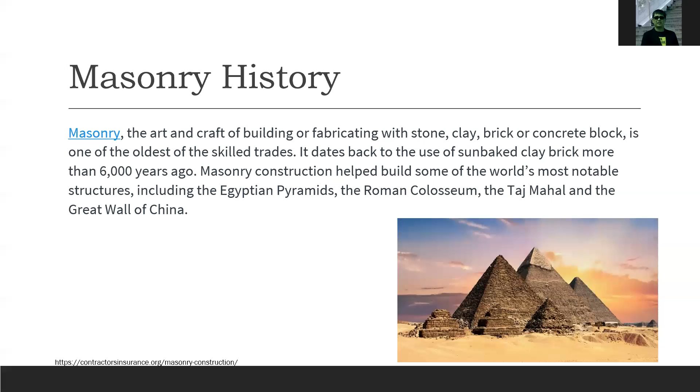So they were piling stones so that they could live under the stones. So those are masonry. It's a crude form of masonry, but the use of stone as a structure or shelter was being done during that time. But during the Egyptian period, there were structures that were built using limestone and granite.

So in the early days of masonry construction, the art of masonry began spontaneously in the creation of walls from stone or pieces of caked mud. The first mortar was just mud smeared in between pieces of stone to add stability. Over time, brick and later limestone were introduced in masonry construction. So the first type of masonry construction was mud and stone. They used the mud as the mortar.

So the stone should be able to attain a stable stone and mud connection. During those times, there was no mortar yet. So they used the mud, or putik, as a binding material. And during the early time, before 6,000 years ago, before the time of the Egyptians, they used the mud and the stone as temporary shelters or structures.

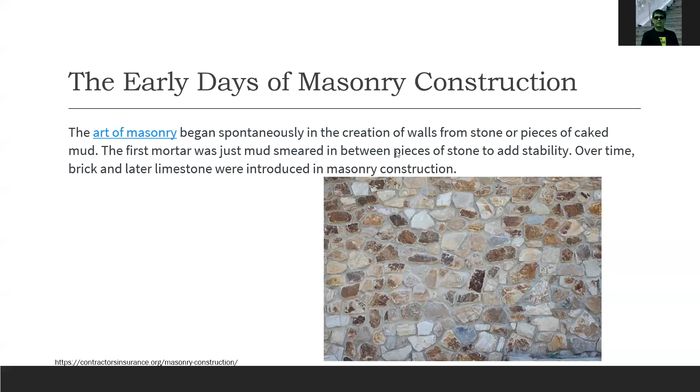During the Egyptian period, as long ago as 2,600 BC, the Egyptians were using basic masonry to build one of the most impressive structures ever created. They created the pyramids by stacking large pieces of limestone. Granite was used to construct the roofs and walls of the burial chambers. Gypsum and rubble were used to fill in the gaps to stabilize the structure despite having almost no binding properties. Egyptian workmen likely used copper chisels, drills, and saws to cut the limestone.

So there was a boom in building structures during the Egyptian period. They used limestone or granite. They quarried it from a mountain, cut it to specific sizes, then put the pieces on top of each other, and they used gypsum and rubble as binders. But sometimes they used a dry type of construction, without any adhesives or mortar. And sometimes they used mud as part of the binding mortar.

As you can see in the Temple of Isis and the Philae Temple, those are structures using cut limestone as the material for the building. The Egyptian masons cut the limestone and then put it on top of each other. There are several theories regarding how they built it. There was no exact engineering or exact science during that time to help them build those structures, but they certainly did a good job.

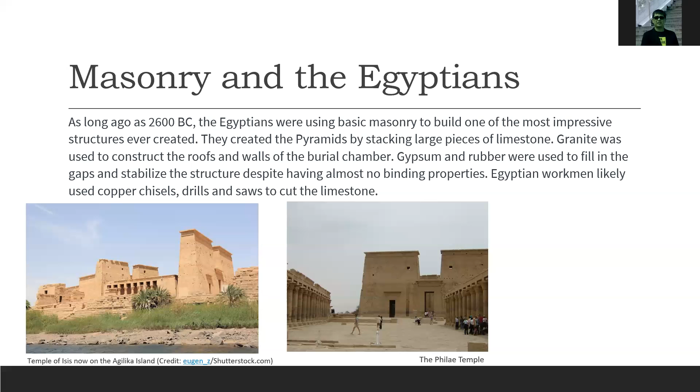In this period, it would be difficult for us to build those structures without machines. We need machines to build those structures, but during that time there were no machines to help them.

In the Middle Ages, or medieval times, stone was frequently used to build castles, bridges, cathedrals, and other structures that were designed to stand the test of time. Stone gave masons an opportunity to build much higher and support much heavier structures. Castles were sometimes built with a combination of masonry stone and limestone plaster, which provided a bright white and yellow color.

So as you can see, during the Middle Ages there were limited technologies available, but there were skilled craftsmen trained to do this type of masonry work. Unlike the Egyptians, for whom we have no specific data on how they did it, during the Middle Ages there are writings and books we can search on how they built those castles.

The cathedrals are still standing. We can still see those cathedrals and castles, but some of them have deteriorated because of exposure to weather, while some are now being restored, like in our country, the Philippines, where we restore old churches that were built during the Spanish period.

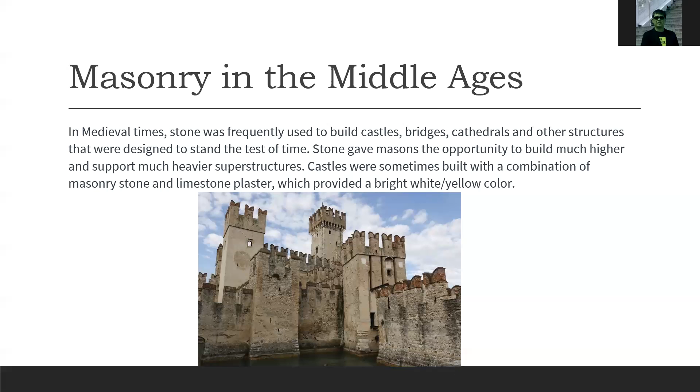So if you see the church in Iloilo, they used eggshells and egg white as binding material combined with limestone to make plastering, to plaster the churches.

So masonry during the Industrial Revolution: in America and Europe, machines were developed that made masonry much easier. These technological advances made it simple to quarry, transport material, and mold bricks. For the first time, sophisticated mathematics were used to create more elaborate structures. Buildings of this era were noted for having greater strength and durability.

So as you can see, during that time, we now have the machines that can help the craftsmen or the masons to build the buildings. And schools are open to teach people to design structures, to use the proper material. But there is also limitation during the Industrial Revolution, because of the availability of material and technology, compared to our era.

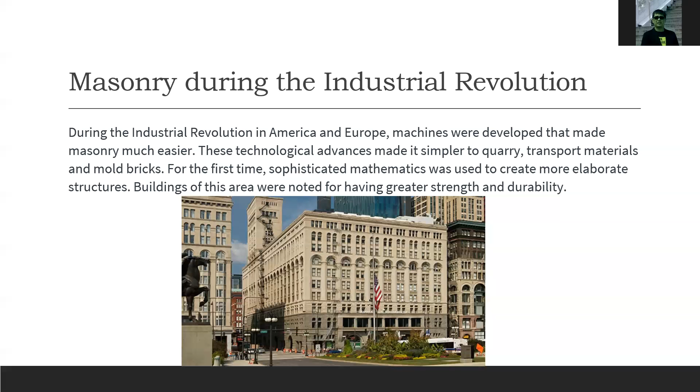But there also came a time that skyscrapers were built, and the art of masonry somewhat lost its luster in the late 19th century, after metal frames replaced stone-bearing walls in very tall buildings in major cities. However, the development of the concrete block used in such structures can be traced back to brick construction. Concrete block is frequently used today in construction because it's much cheaper than cut stone and requires less labor than laying brick.

So it is a building using metal as frame, combined with concrete hollow blocks. So the use of solid or quarried stone was replaced by the use of metal frames. Instead of using quarried stone, putting one atop each other, they now use the metal frame. So it created a higher building. So this was the birth of the skyscraper.

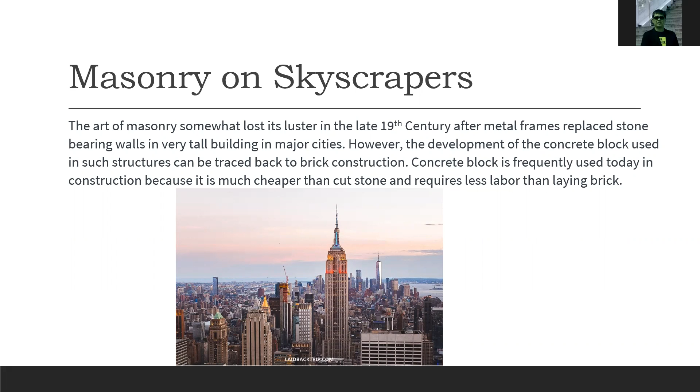So masonry structures are built from individual units laid and bound together by mortar. The term masonry can also refer to the units themselves. The common materials of masonry construction are brick, stone, marble, granite, limestone, cast stone, hollow concrete block, reinforced brick masonry, glass blocks, stucco, tiles, and others.

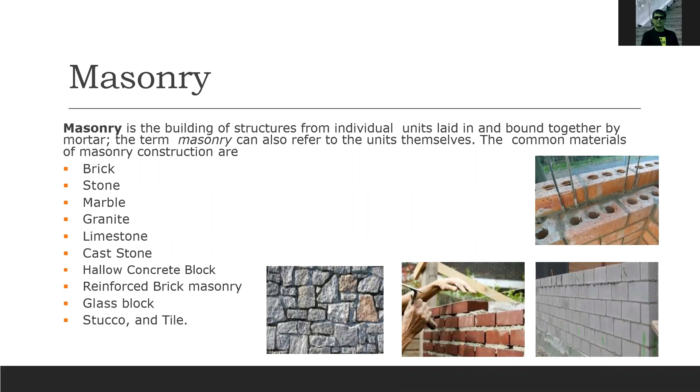So as you can see in the illustrations, you can see the use of stone, the use of bricks, and the use of hollow blocks. So these are the different materials that you can use in masonry construction. Masonry is commonly used for walls of buildings, retaining walls, and monuments.

Bricks and concrete blocks are the most common types of masonry in use in industrial nations and may be either weight-bearing or a veneer. Concrete blocks, especially those with hollow cores, offer various possibilities of masonry construction. They generally provide great compressive strength and are best suited to structures with light transverse loading when the cores remain unfilled. Filling some or all of the cores with concrete or concrete with steel reinforcements, typically rebars, offers much greater tensile and lateral strength to the structure.

So there is also an evolution in the use of masonry in construction, from using crude stone to the recent concrete hollow blocks. But now we have prefabricated concrete, available in different sizes and shapes, and some are being installed using the masonry principle.

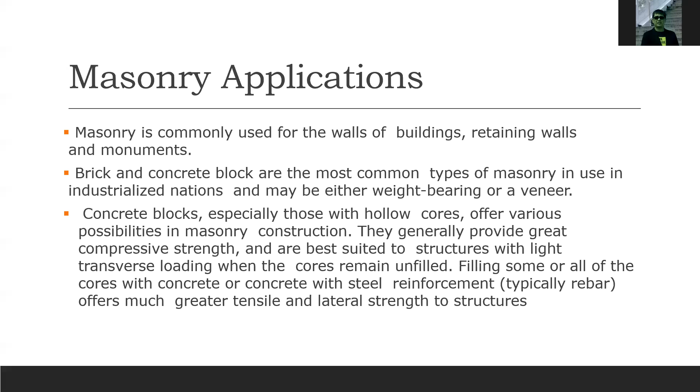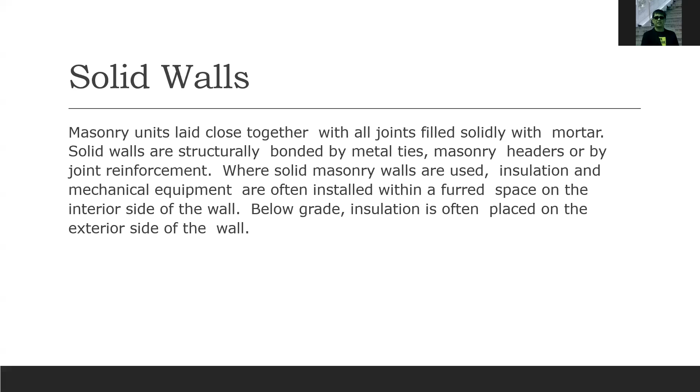In the veneered wall, this type of masonry is used as a facing material; in this case the masonry does not act structurally. It serves to perform as a weather barrier and as a finish material. Insulation and mechanical equipment is normally located between the studs.

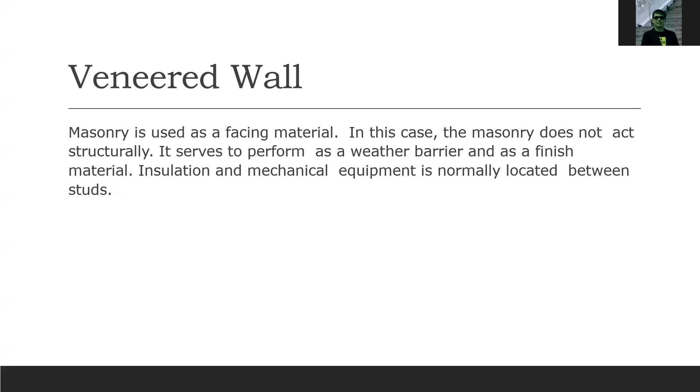So the veneer is what we now call the tiles, right? So it is a surface or the facing material, interior or exterior, of the masonry. Okay, so that is the masonry veneered wall. This veneered wall acts as an exterior finish and at the same time protects the solid walls. But it doesn't have the structural characteristic to stand on its own. It needs a wall to be attached on.

Cavity walls are composed of two wythes of either solid or hollow masonry, separated by a continuous airspace and bonded together with metal ties or joint reinforcement. The cavity offers important advantages in areas of severe exposure. The continuous air space provides insulation value and a place where additional insulation may be installed. The continuous airspace acts as a barrier to moisture penetration.

In cavity walls, insulation and mechanical equipment are often installed within the cavity or within the furred space on the interior of the wall. So this cavity wall is two solid walls with a space in between them. The space in between the two solid walls is the cavity where you put the electrical, plumbing, and mechanical works, and it also acts as insulation where you can put moisture protection, heat protection, and other utilities. You can use that cavity.

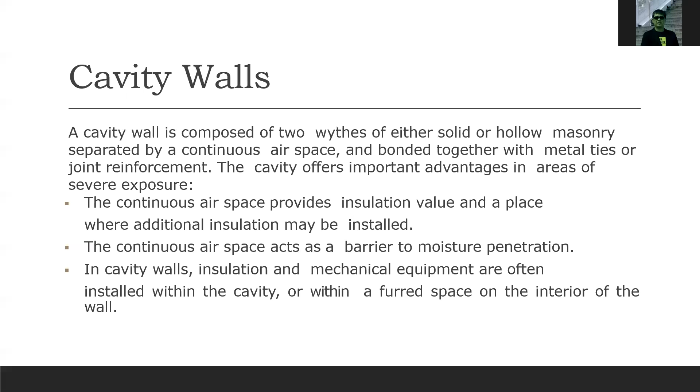Mortar acts as a cementing material that binds individual masonry units together to act as a homogeneous mass. Common mortars used in brick masonry are cement mortar, lime mortar, cement lime mortar, lime surkhi mortar, and mud mortar. So these are the different types of mortar that you can use in binding stones or masonry.

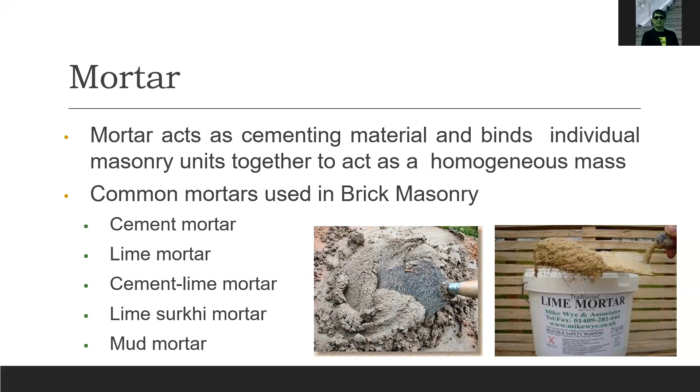Brick masonry is made of clay or shale, formed, dried and fired in a manufacturing process. These variations are addressed by a durable ceramic product. When bricks are laid in mortar in a proper systematic manner, they form a homogeneous mass which can withstand forces without disintegration. This mass of structure made by the use of bricks is called brick masonry or simply brickwork.

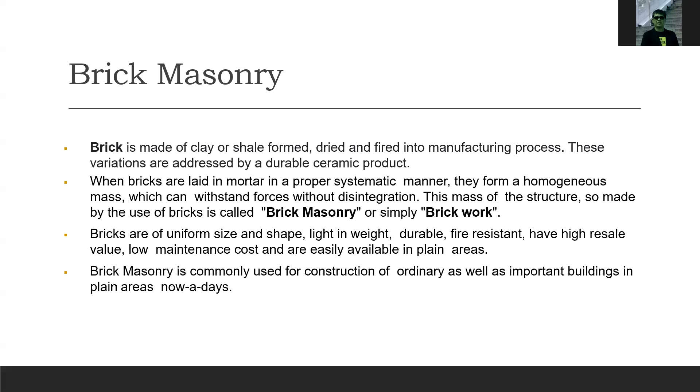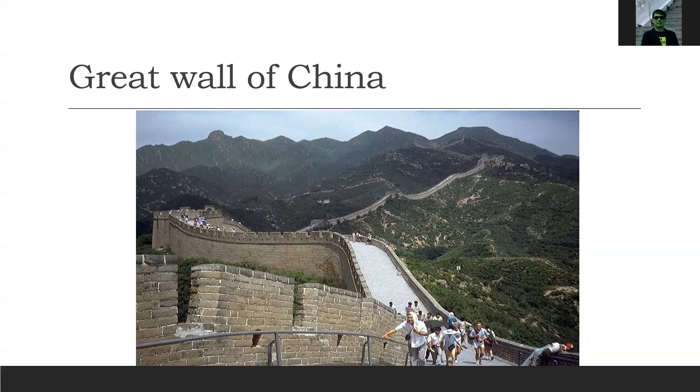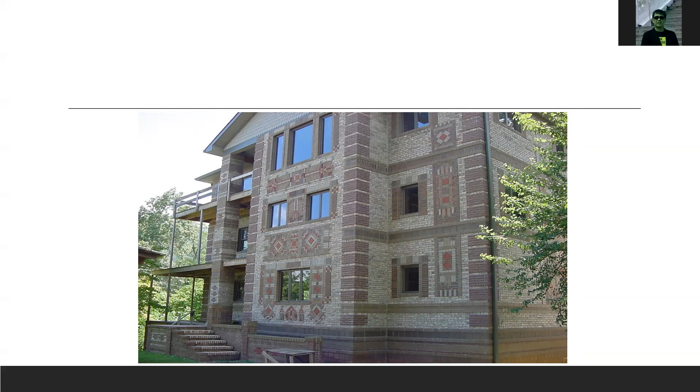Okay, so the brick positions. We will now go into the different positions of the bricks. If you lay the brick on its flat side, this is called the stretcher. If you lay the end of the brick flat, that's called the header. If it's standing up and showing the shorter side, it's the soldier. If it shows the bigger flat area, it's the shiner. Then if it shows the edge turned on the other side, it's the rowlock. And if the shiner is in the vertical standing position, it's a sailor.

So as you can see, the sailor and the soldier are vertical, right? The stretcher and the shiner are horizontal. And the header is horizontal, but it shows the ends of the brick. So these are the different positions. It's important because you will see all of these positions in the different samples of how they lay down the bricks.

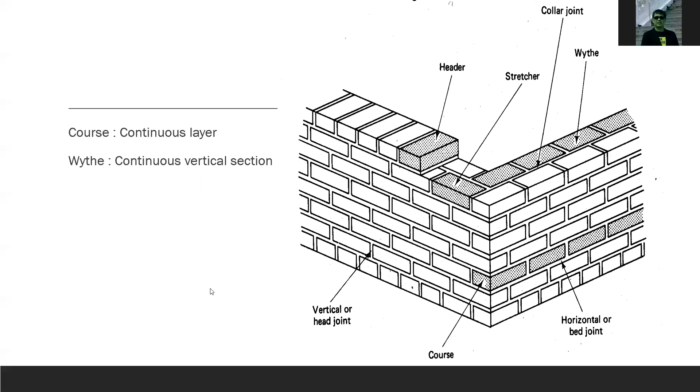Now, the different terminologies that are being used for this brick laying can be seen also on different brick layouts later. So as you can see, this is the head joint, the vertical connection of the mortar; that's called the head joint. The horizontal connection of the mortar, that is the bed joint. And the layers of bricks are called the courses. So each layer of the brick is called a course, or horizontal layer of brick.

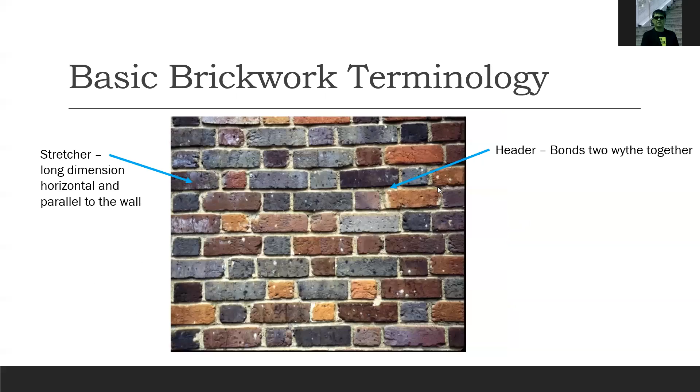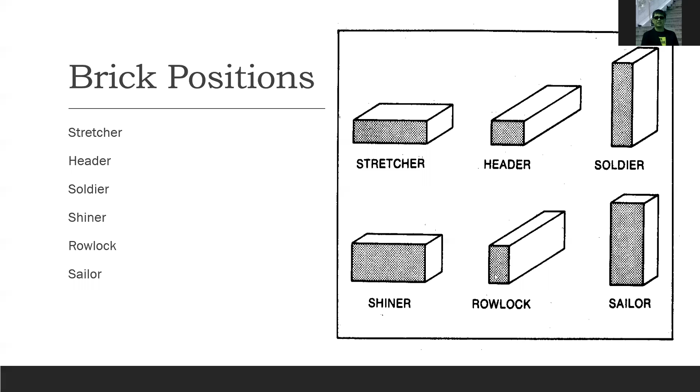Okay, so this is also what you call the stretcher, that is the face of the brick. And the header, that is the bonds two wythe together. The header, this is the wythe. And this is the header, as you can see. So the rowlock, that is laid on the face and the end visible. This is the rowlock. It's also here. Okay, that is the rowlock. This is the header. So these are all different terminologies in positioning of the bricks.

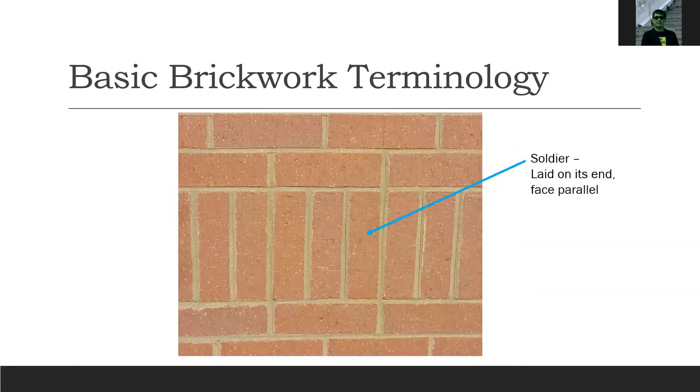Okay, bond is the arrangement of bricks or stones in each course, so as to ensure the greatest possible interlocking and to avoid the continuity of vertical joints in two successive courses, both on the face and in the body of a wall. So this is to avoid the vertical joints. Because the bricks usually don't have reinforcement, they avoid the vertical joints being connected above each other, because that will weaken the wall.

So a bond is provided to achieve the following objectives. The primary objective of providing a bond is to break the continuity of the vertical joints in successive courses, both in the length and thickness of the masonry structure. This is to avoid the vertical connections meeting each other, so the structure will act as a bonded mass and its load will be transmitted uniformly to its foundation.

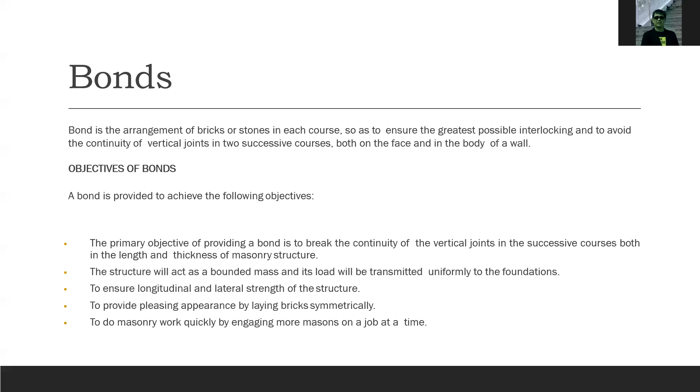To ensure longitudinal and lateral strength of the structure. It is also used to provide pleasing appearance by laying bricks symmetrically, and to do masonry work quickly by engaging more masons on a job at a time. So this will make it faster if you do it by designs or by patterns. They can repeat the patterns on other sides and it will certainly meet, because of the regularity of the joints, or the design of the joints. So this is the brick bonds.

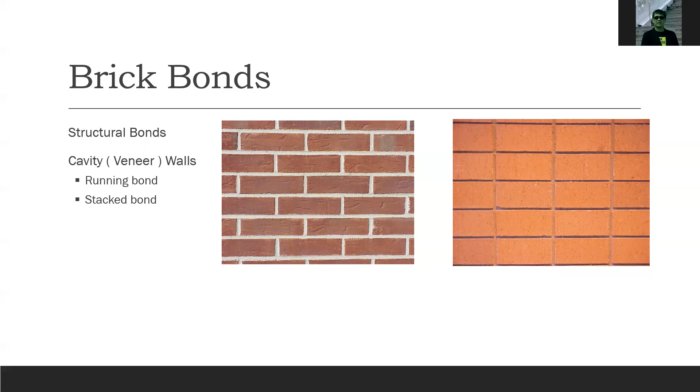On the left side, this is a cavity veneer wall. So this is the running bond and the stack bond. This is a way to install veneer, the veneer or the facing of a thin brick, surface facing. So this is what you call the cavity wall, running bond, and the stack bond. The one on the right side is the stack bond, and the one on the left side is the running bond.

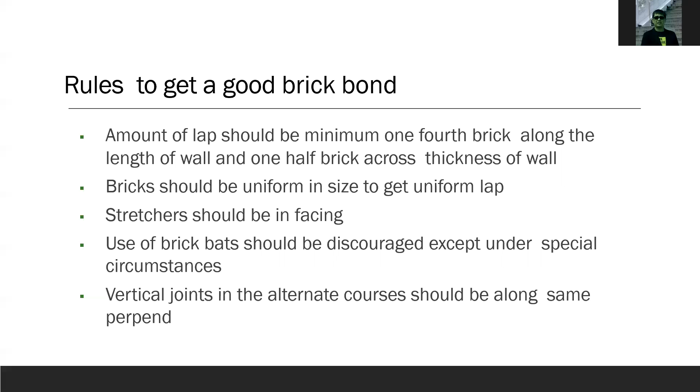So rules to get a good brick bond. Amount of lap should be minimum 1/4 brick along the length of the wall and 1/2 brick across the thickness of the wall. Bricks should be uniform in size to get a uniform lap, and stretchers should be in facing. Use of brick bats should be discouraged except under special circumstances, and vertical joints in the alternate courses should be along the same perpend.

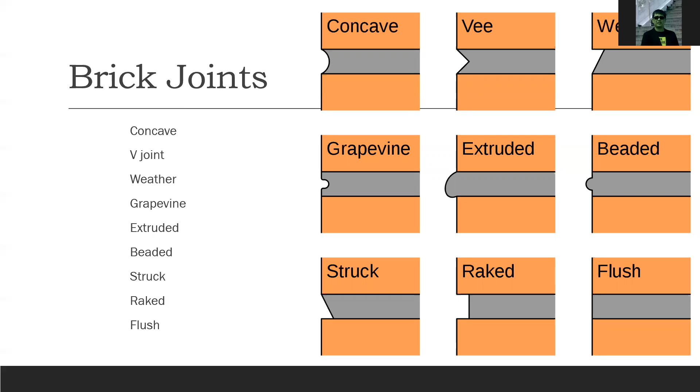So these are the different brick joints. You can see the concave, the V joint, the weather, the grapevine, extruded, beaded, struck, raked, and flush. So these are the connections, or the mortar finishes, in between two bricks. So as you can see, this is the concave joint.

It is the most common joint that is used, as it is also known as the best joint for preventing water penetration. Tooling works the mortar tight into the joints, which produces better weather resistance. So there is a specific tool that you need to use to create a concave joint.

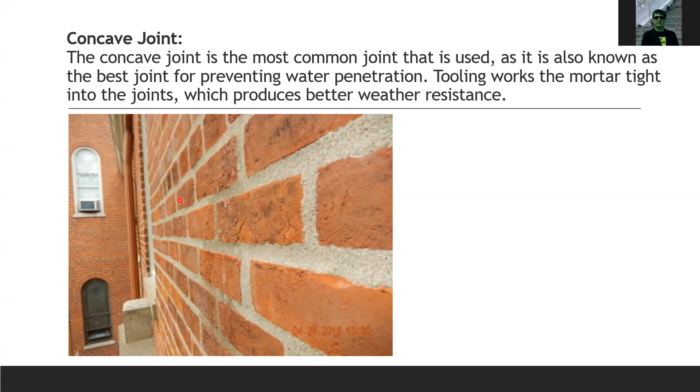If it is not tooled correctly, water can accumulate in the joint. Similar to the concave joint, tooling works the mortar tight and can help prevent water penetration if done correctly. So you need a specific type of tool to create those joints.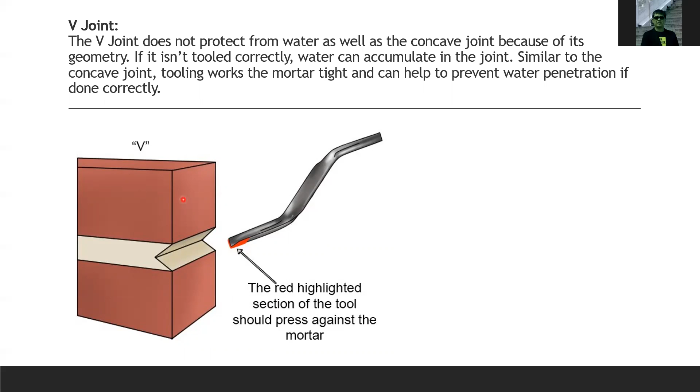The V joint. This is the rake joint. The rake joint is another joint not recommended for exterior use because of its ledge. It may allow water, snow, ice to sit on top of the brick due to the fact that the mortar sits back from the face of the brick. There is less cover face between the face of the mortar and the joint and top of the brick unit where the cores exist. Saturated mortar joints can allow water to enter the cores and penetrate through the wall.

So in this section, in this brick, as you can see, the brick is like this one, and then there is what you call another mortar, and there is another brick, and the mortar is here. This is the mortar. Okay, so there may be another brick on this side. There may be another brick on this side, and there is mortar also on this side.

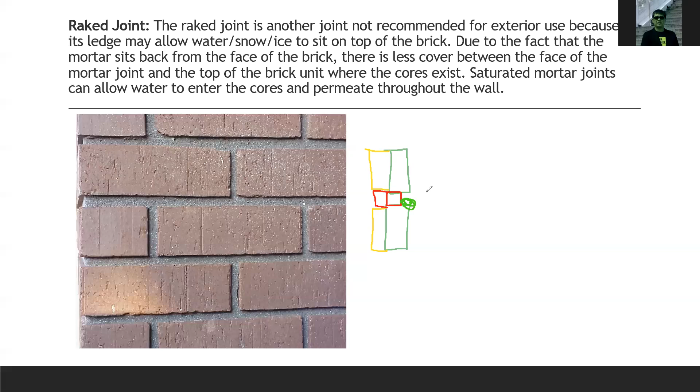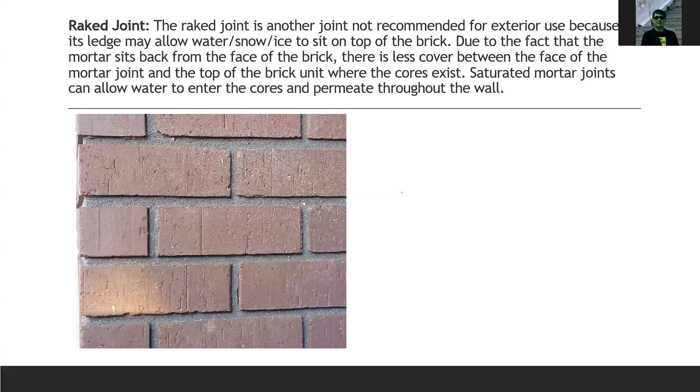Okay, but the problem is with this type of brick layout, water can accumulate on this side. Water can accumulate, and there will be penetration of water or seepage. So this type of rake joint is not recommended for exterior brickworks. Okay. Okay, so this is a sample of a brick using concave design.

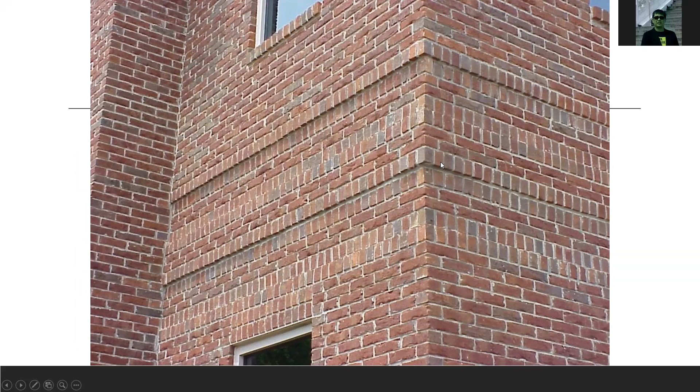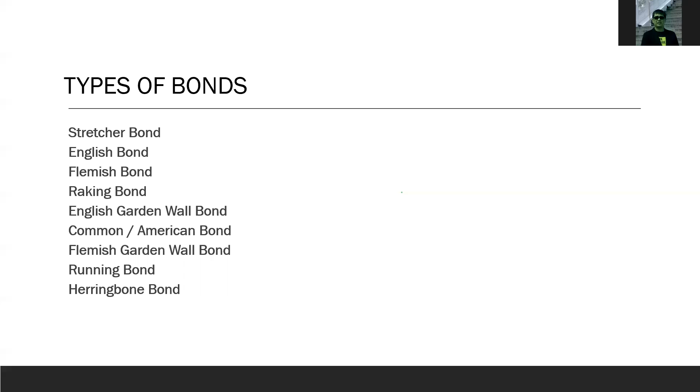So types of bonds: we have the stretcher bond, the English bond, the Flemish bond, the raking bond, English garden wall bond, common American bond, Flemish garden wall bond, running bond, and the herringbone bond. So this is the stretcher bond, as you can see. This is the easiest bond to lay and minimizes the amount of cutting required. Originally used for single brick walls, now called the half brick walls. It became the obvious choice for cavity walls and less cutting was required. So this is more economical and more practical to use because there is less waste of bricks.

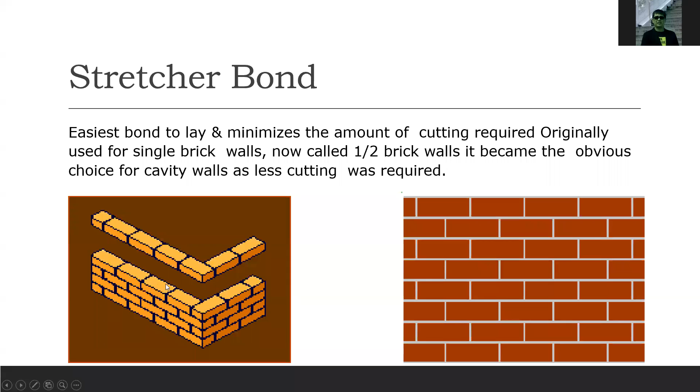So the position of the brick is alternate. The connection of the brick is alternate, as you can see. But the sizes of the bricks are all the same. So this is the English bond. The difference is the perpendicular and the parallel. As you can see, this is the parallel and this is the perpendicular. So it's an alternate: parallel, perpendicular, parallel, perpendicular. This is called the English bond. Okay. So as you can see in the exterior, this is the parallel and this is the perpendicular, so this is the English bond.

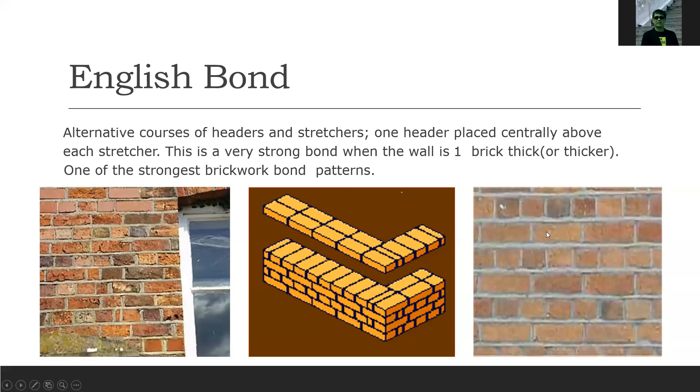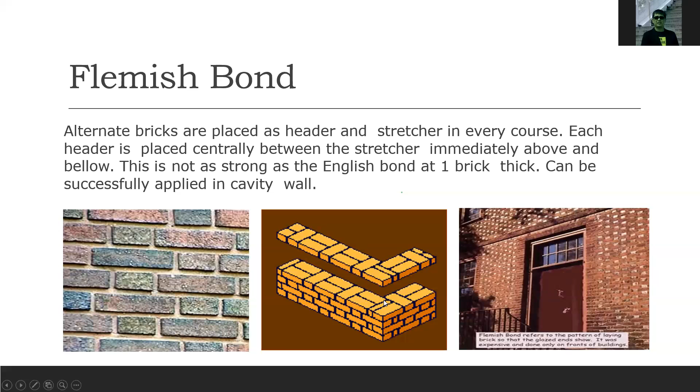So there is also what you call the Flemish bond. Alternate bricks are placed as header and stretcher in every course. Each header is placed centrally between the stretchers immediately above and below. It is not as strong as the English bond at one brick thick and can be successfully applied in the cavity wall. As you can see, there is also an alternate, but there is one, and then there is two: perpendicular, parallel, perpendicular. So this is called the Flemish bond.

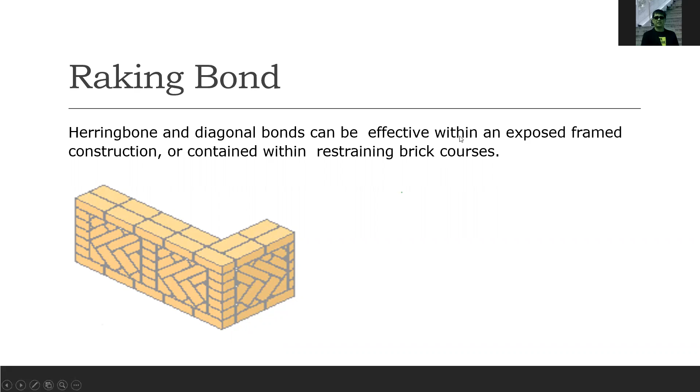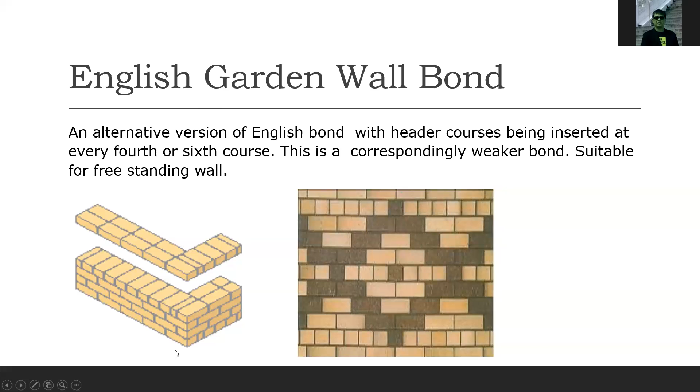So this is the English garden wall bond. A header course is inserted at every 4th or 6th course. So this is the design that you will see if you use an English garden wall bond. This is the way it will be laid out, and this is the design. The common American bond and the Flemish garden wall bond.

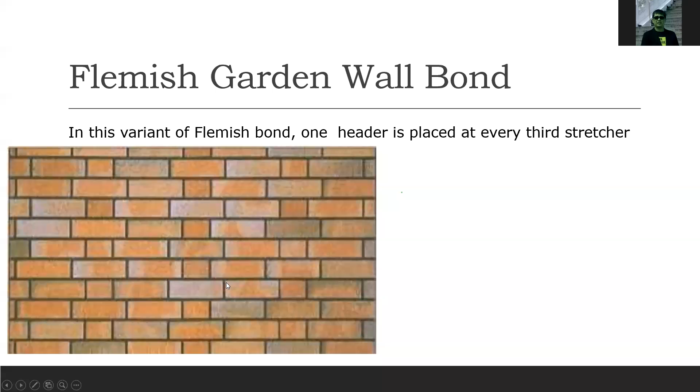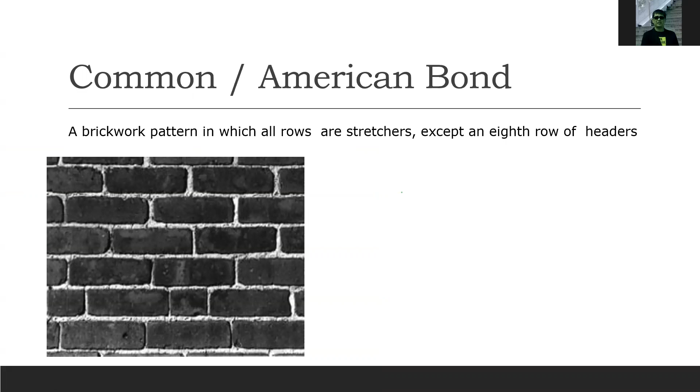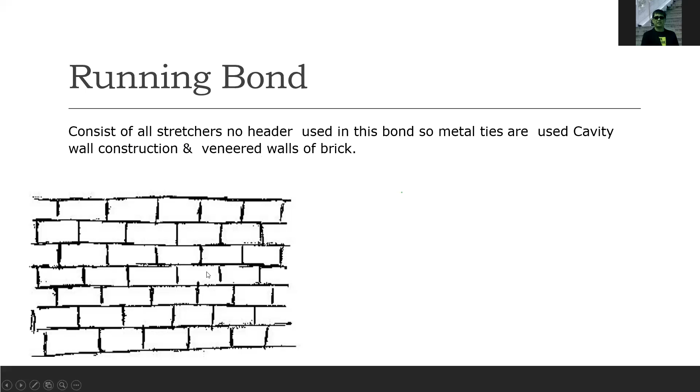And this is the running bond, similar to the common American bond, except the headers on the 8th row. So in the common American bond, every 8th row there is a change of direction of the brick. But the running bond consists of all stretchers, no header. Metal ties are used in cavity wall construction and veneer brick walls. This is what we usually see, the running bond. This is the herringbone bond. It's a purely decorative bond, used in floors, walls and panels.

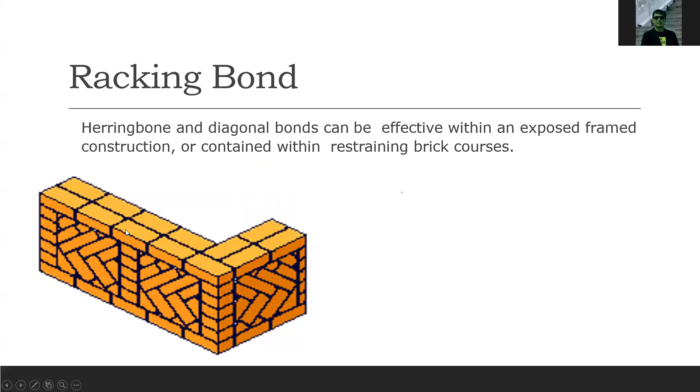The raking bond, herringbone and diagonal bonds can be effective within exposed frame construction and contained within restraining brick courses. Now we go to the stone masonry.

Rock that is removed from its natural site and generally cut or dressed and then finished for building purposes is called stone. The art of building the structure with stones as construction unit is called stone masonry. So if you quarry a stone and then cut it to a specific size, or not cut it to a specific size, it's called stone masonry.

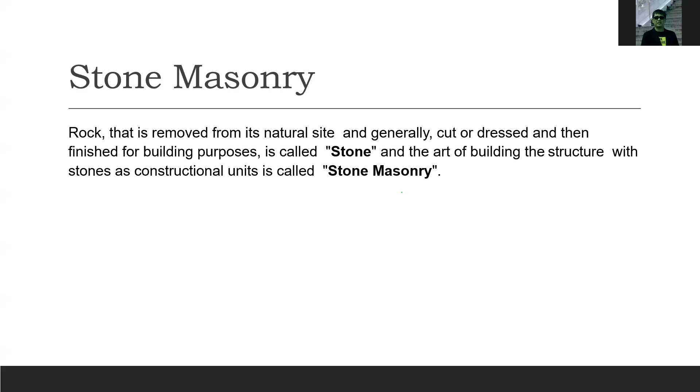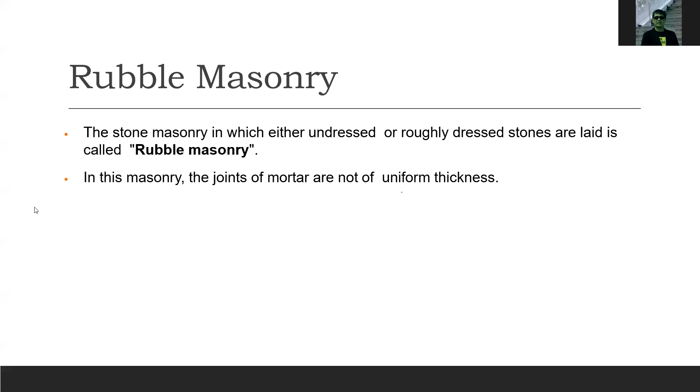We have different types of stone masonry: rubble masonry and ashlar masonry. Rubble masonry is the stone masonry in which either undressed or roughly dressed stones are laid, and the joints of mortar are not uniform in thickness. We have different types of rubble masonry: uncoursed rubble masonry, coursed rubble masonry, built to regular coursed masonry, polygonal rubble masonry, flint rubble masonry, and dry rubble masonry.

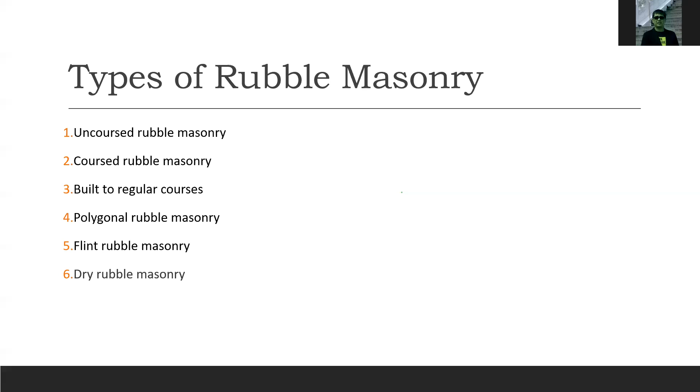Uncoursed random rubble masonry is the masonry in which all stones are laid without forming courses. This masonry is the cheapest and roughest type of masonry. The stones used are of different sizes and shapes. Larger stones are used at the corners and jambs to increase their strength.

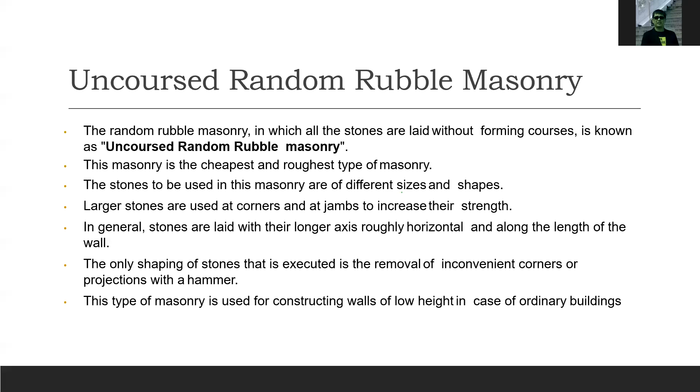In general, stones are laid with their longer axis roughly horizontal and along the length of the wall. The only shaping of the stone that is executed is the removal of inconvenient corners or projections with a hammer. If there are corners or irregular corners, they will be trimmed using a hammer. This type of masonry is used for constructing walls of low height in ordinary buildings.

The bonders are stones which reach beyond the middle of the wall from each face to overlap in the center. The throughs are stones which extend the full thickness of the wall. Throughs should not be used in external walls, as moisture may be conducted through them and cause dampness on the internal face.

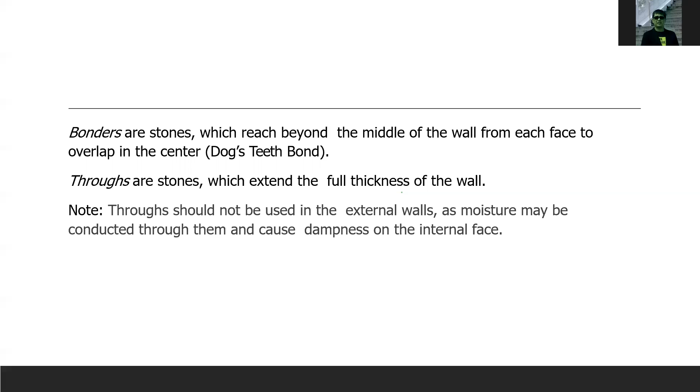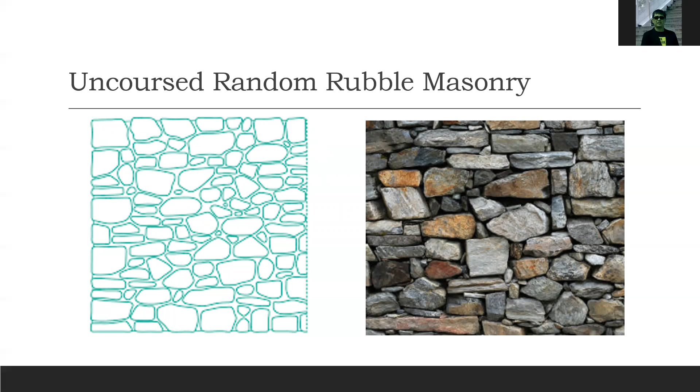This is a sample of uncoursed random rubble masonry. As you can see, the shapes or sizes of the stones are not even - they are not all the same. They have rough edges and are randomly arranged. That is why it's called random rubble masonry.

In coursed rubble masonry, the stones are laid in layers of equal height - so there is now a regularity. If smaller stones are encountered, two or three stones are stacked one above the other to obtain the height of the course in which it is placed. Such stones are placed in intermediate courses and avoided at corners, bedding, and other critical locations.

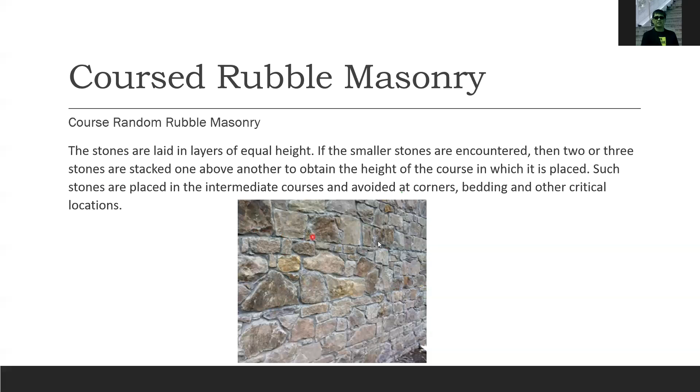You can see now the horizontal lines in this coursed rubble masonry - there is a recognizable horizontal line which they try to maintain and attain by combining smaller and bigger stones, creating a flat horizontal line for another layer to be installed. As you can see in this drawing, there is a horizontal line, and from this line to this line they put smaller, medium-sized, and small stones to create the specific height they want. So there is a horizontal layering of the rubbles.

Now we have the coursed square rubble masonry. In this type of masonry, the stones are chiseled into an almost square shape and arranged in courses. This chiseled dressed square stone is arranged in the facing while the backing constitutes uncoursed random rubble masonry.

In this type of coursed square rubble masonry, you can see that the joints or connections are even. Even the horizontal and vertical lines have enough straightness to create a square shape.

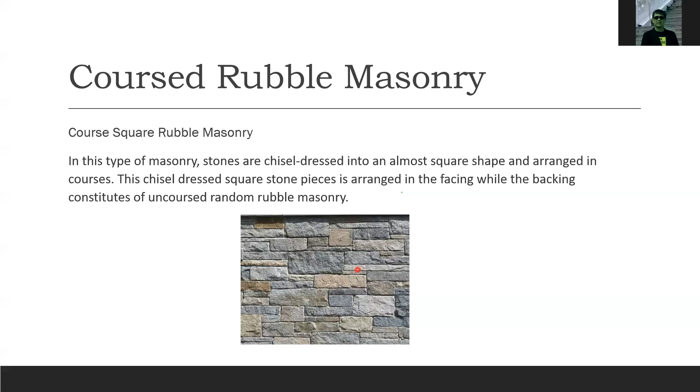Built to regular coursed masonry refers to the type of masonry brought to course. In this type of masonry, stones of uniform height are laid in horizontal layers not less than 130 millimeters in height. The stone beds are hammered, chiseled, and dressed to at least 10 centimeter depth from the face to facilitate proper bonding. The vertical joints in consecutive courses should not be allowed to coincide.

Construction patterns of this type of wall resemble that of uncoursed random rubble masonry. The major difference is that the masonry is roughly leveled up to course at irregular intervals, unlike uncoursed random rubble masonry where the stone pieces are not laid in courses. The intervals of this masonry are decided based on locality and the type of stone used, generally between 300 to 900 millimeters.

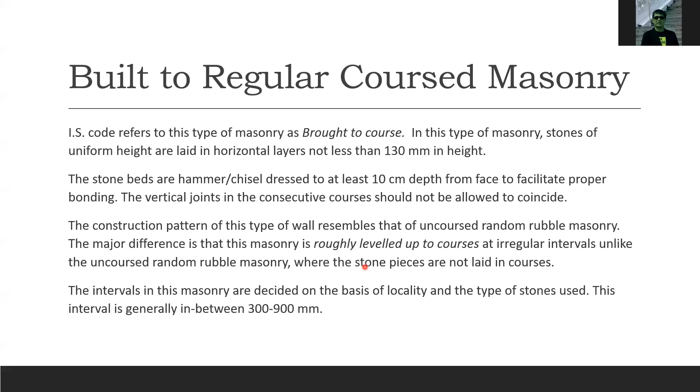Now we have the polygonal rubble masonry. In this type of masonry, the stones are roughly hammered and pitched into irregular polygonal shapes. The stones used are mostly without prominent stratification.

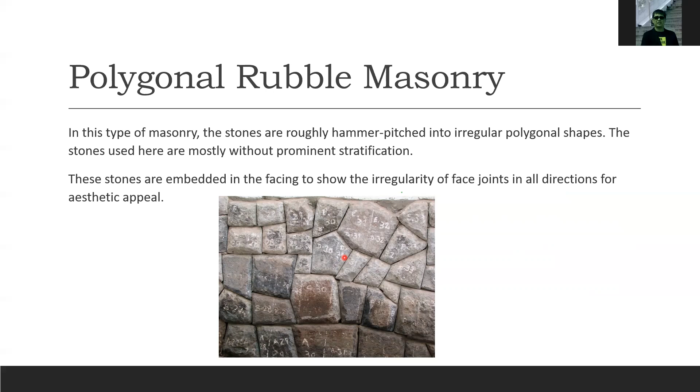These stones are embedded in the facing to show the irregularity of the face joint in all directions for aesthetic appeal. This is the polygonal masonry, using rubbles that are hammered into irregular polygonal shape.

The flint rubble masonry is generally used where flint or cobbles are available in abundance. These cobbles are stones shaped to 8 to 15 centimeters thick and 15 to 30 centimeters long. These stones are hard but brittle, and are laid in facing either coursed or uncoursed. The brittleness of the stone reduces the strength of the masonry, which is supplemented by lacing courses of thin stones or bricks at 1 to 2 meter intervals in the vertical direction.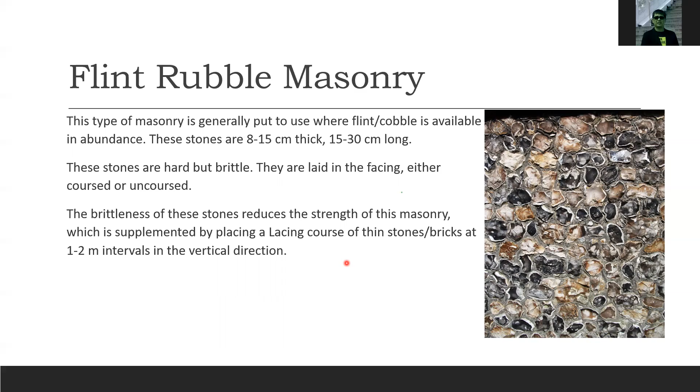This is the dry rubble masonry. It is constructed in the form of random rubble masonry without mortar. This is achieved by filling up the hollow space around the placed stone with smaller stones, and so on, until the stones are tightly packed. This is cheaper since the cost of mortar is nullified, but at the same time, skilled manpower is required to manage the stones alone without mortar.

The height of the stone pieces should be no greater than 6 meters, and if it is greater than 3 meters, 3 adjacent courses are laid at 3-meter intervals in a square rubble masonry, to make it approximately up to 6 meters. So this is what you call dry rubble masonry. You need skilled workers to do this, because you need to attain a compact laying of masonry, since you will not use mortar for this type of masonry work.

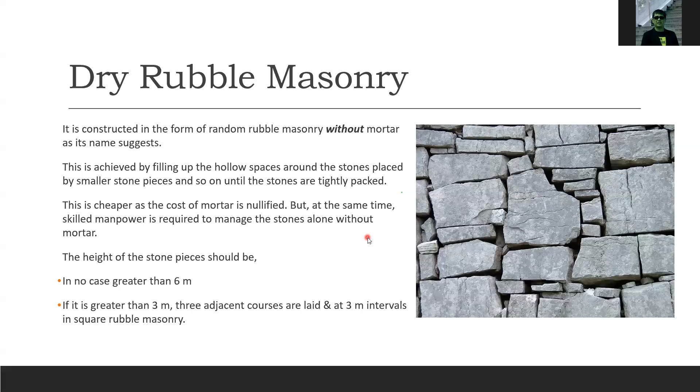Now we go to ashlar masonry. The stone masonry in which finely dressed stones are laid in cement or lime mortar is known as ashlar. These use finely dressed stone. In this masonry, all of the joints are regular, thin, and of uniform thickness.

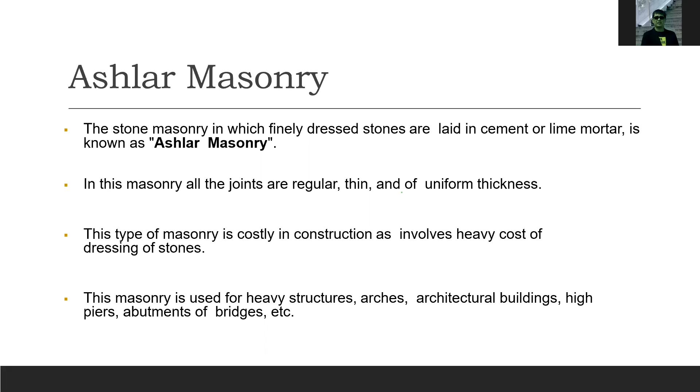This type of masonry is costly in construction as it involves heavy cost of dressing the stone. This masonry is used for heavy structures like arches, architectural buildings, high piers, abutments of bridges. So this is called ashlar masonry, in which the stones are finely dressed and finely cut.

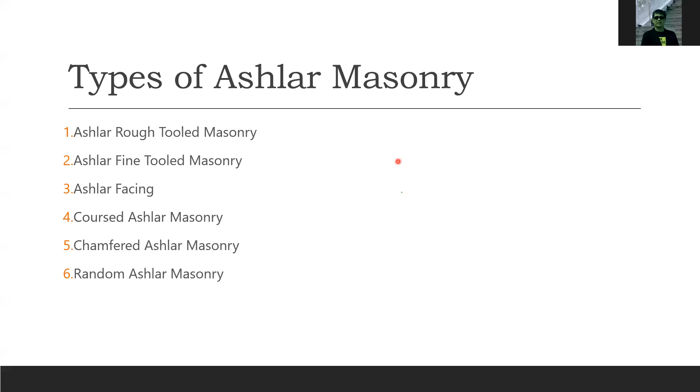So we have different types of ashlar masonry: ashlar rough tooled masonry, ashlar fine tooled masonry, ashlar facing, coursed ashlar masonry, chamfered ashlar masonry, and random ashlar masonry. In ashlar rough tooled masonry, the beds and sides are finely chiseled and dressed but with rough tooling.

The exposed face is dressed with a rough exposed finish. This is done by dressing - so after you install the stone, you chisel it to perfection.

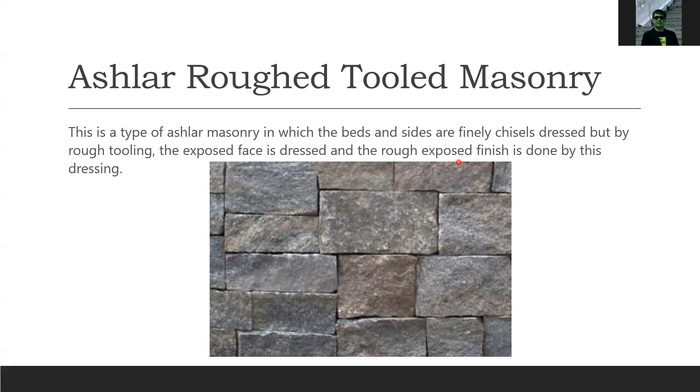This is the ashlar fine tooled masonry, the finest type of ashlar masonry. To remove all unevenness in the bed joints, the faces of the stones are chiseled, dressed, and the joints obtained are perfectly horizontal and vertical. There are thin mortar joints which give a very close and packed finish in this type.

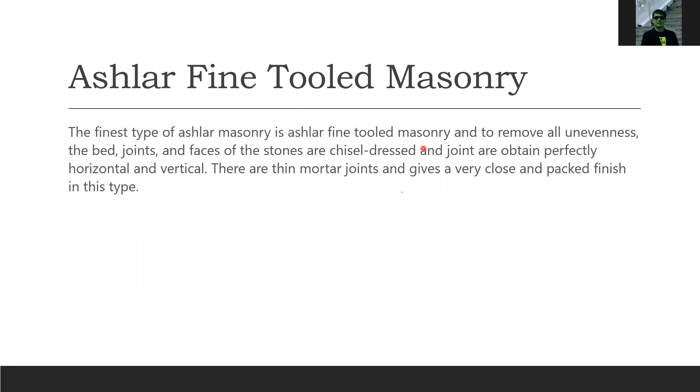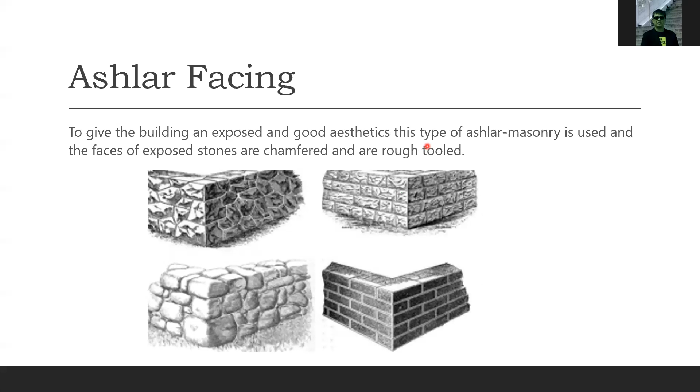This is ashlar facing, used to give the building an exposed and good aesthetic. In this type, the faces are exposed stones, chamfered and rough tooled. If we say it's ashlar, it is finely tooled, so it's not an irregular shape.

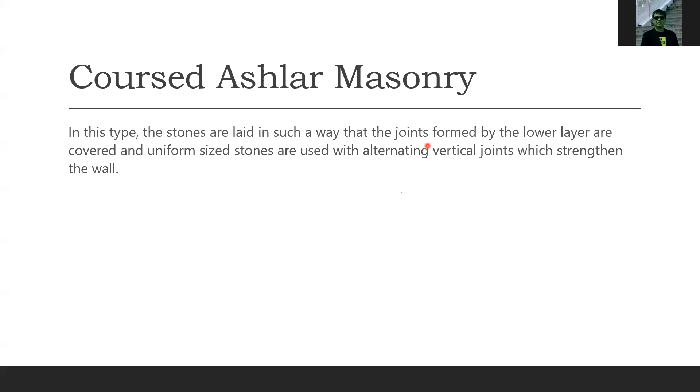It's finely tooled. Coursed ashlar masonry: in this type, the stones are laid in such a way that the joints formed by the lower layer are covered and uniform sized. Stones use alternating vertical joints which strengthen the wall.

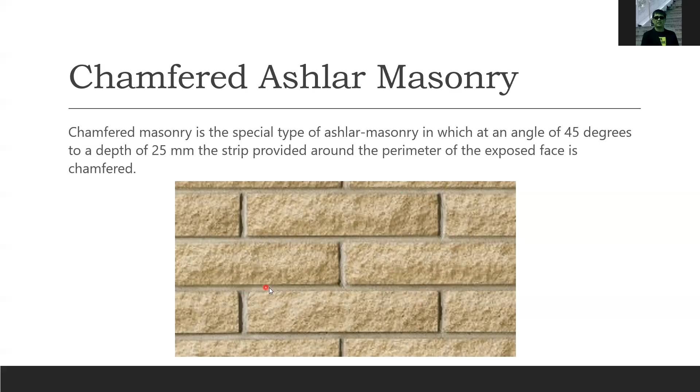The chamfered ashlar masonry is a special type of ashlar masonry in which, at an angle of 45 degrees to a depth of 25 millimeters, the strip provided around the perimeter of the exposed face is chamfered. As you can see, the edges are chamfered - this is the chamfered ashlar masonry.